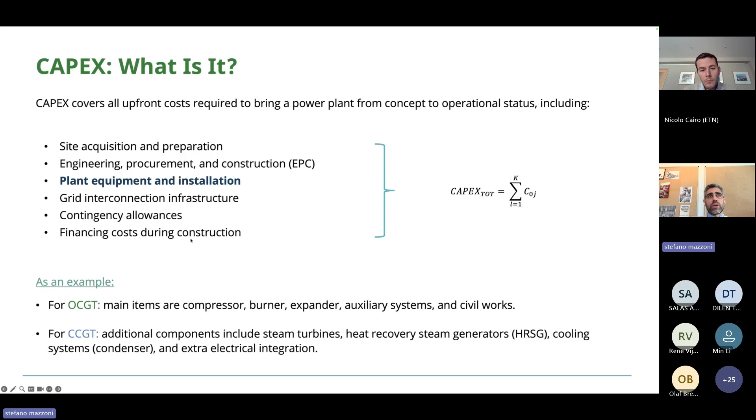So how do we compute this term, the plant equipment? Basically you need to enter the details of the power plant, understanding which are the main components that constitute the plant, and identify which ones actually compute the cost, because usually you have what's called balance of plant, BOP - a percentage of the investment cost for the plant equipment, small costs such as valves, small piping, sensors that aren't computed directly.

For the main components, such as the gas turbine, the heat recovery steam generator, the steam turbine, the condenser, the filtering, and the pumps, you usually compute the CAPEX for each component. And as mentioned before, for the OCGT, you can also break it down into compressor, burner, and expander and so on. For this approach, let's consider the cost of the technology, a gas turbine.

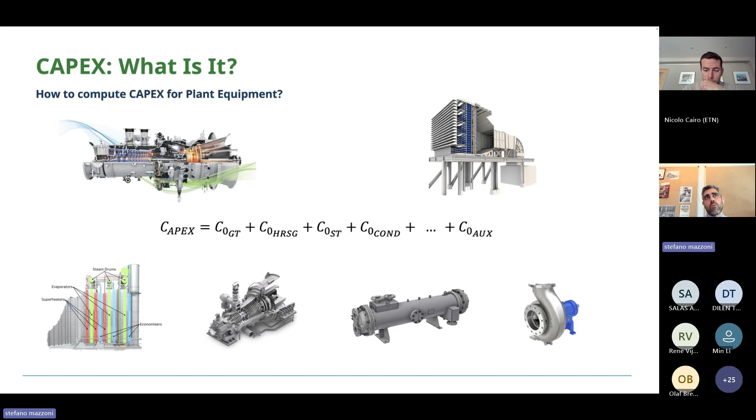The point is that when you ask for a quotation, typically the OEMs are not so open to disclose the prices and cost of each technology. So sometimes if you're rushing and need support with numbers for evaluating project feasibility before the OEM replies to your email asking how much it is and how you can discount it, you can consider using an approach called the factorized method.

This is a modified formulation that we published with some of my researchers in some publications, but the concept is that you have a reference cost related to a reference capacity or reference nominal condition of the system, and you can compute the target cost with respect to a target capacity on power, to the power of n, with n typically ranging between 0.55 and 0.85. Then you can correct it with parameters that account for inflation, currency, location, geolocalization, and some additional regulations.

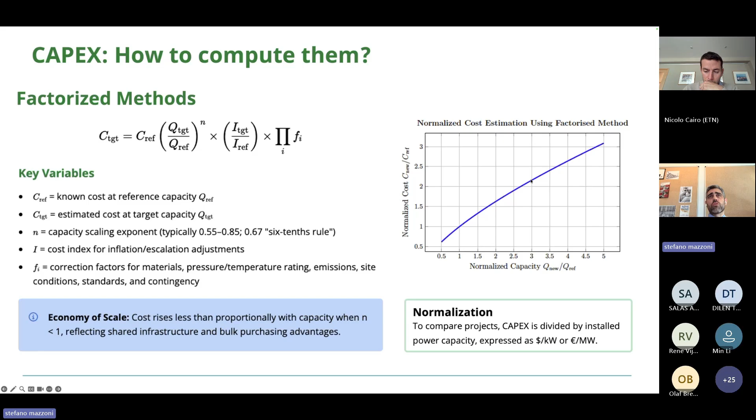And then there is a multiplication of different factors that typically correct it. So if I buy a pump that should be working at ambient condition, or a pump that works in cryogenic or high temperature condition, you use this formula and then multiply by a correcting factor that can be greater or minor than 1. This is a traditional approach that allows a good compromise between accuracy and cost evaluation, giving an identification of the magnitude of the capital cost you want to invest for starting the business. Typically, the shape of the curve is a polynomial expression where you have a nominal or normalized capacity respect to the cost, and after identifying your point, you can correct by the factors.

Here I show how this methodology can be adopted. I went to an IEA report, I think from 2021, which has costs related to CCGT and OCGT power plants in different countries for different capacity. If we want to install a capacity in a region close to one listed here, but I don't have the net capacity perfectly matching this database, let's say we have 450, we will enter the formula with 500 as reference cost, the cost per kilowatt expressed in US dollars per kilowatt electric, at 1,000 for instance, and then we correct with the ratio between 450 over 500, 1,000 divided by the unknown variable, and compute by fixing the index N, which gives the cost of a slightly smaller project.

So if it's 450 instead of 500, if this were linear, we would consider basically a 10% discount, but clearly it's not, because there is a correction that goes with the power of n. So instead of 1,000 becoming 900, it would probably be something around 925, 930.

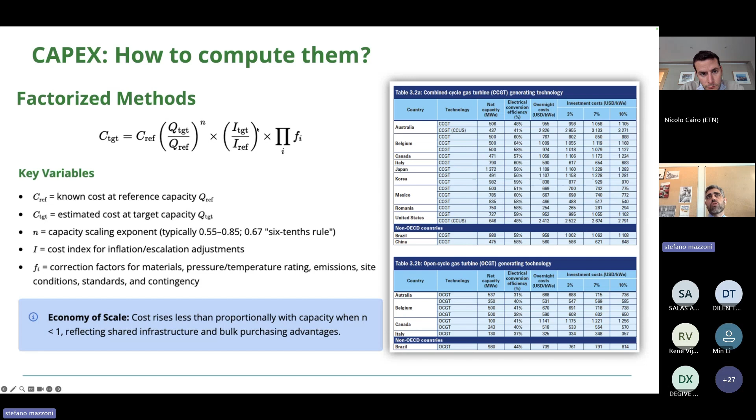This methodology can be easily scaled up to all the components. Here are the terms on the investment cost, as I mentioned, with the index where you have a reference project with a certain inflation rate. If you move the project to another country, you just correct the inflation rate in respect of the other indexes.

Now we go to the second part, which is the most interesting from my perspective, related to the operational cost. In this section we distinguish mainly three voices for the cost: one is the fixed O&M, one is the variable O&M, and then the other one related to fuel cost, and I added also CO2, because in this energy transition we should never forget that in many European countries we have to pay high carbon tax.

So basically, this is something we should consider. When we look at this breakdown of the operating cost, we have some costs that don't vary together with the output of our power plant. So whether I run the plant or not, once it's built and in operation, I need to pay the staff salary, some insurance premiums, the administrative overhead, the maintenance - sorry, there's a typo twice - and this is typically computed as a percentage of the capex. So basically you have all these terms.

The operational cost of the O&M can be calculated as a fixed term of the capex, each voice as a percentage in respect of the capex. By summing them, you can establish what is the fixed O&M.

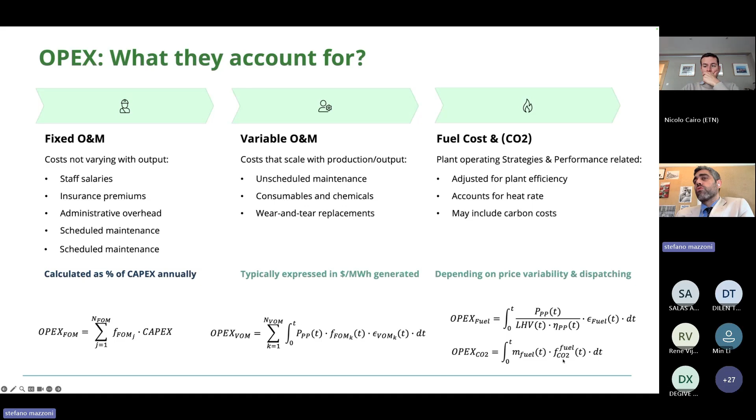Summing up the operating cost structure, you have a fixed part that is CapEx proportional, which you can compute at the beginning of the feasibility study of the plant, and then a part that is time dependent: the variable cost, fuel cost, and operating cost related to carbon tax. That depends on the optimal dispatching strategy, because you can decide how to operate and under which conditions, especially when the plant is integrated in a highly interconnected grid.

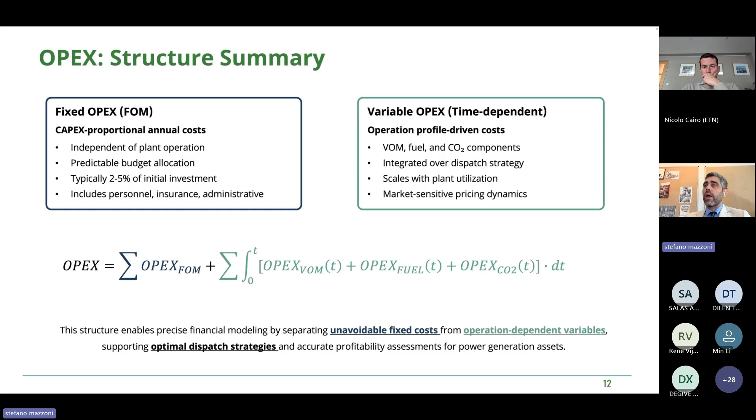Now we move to revenue modeling, and this is something that is probably changing a bit compared to the past, because now we have multiple terms that can compute the revenue. Previously, the only revenue considered was the production of kilowatt hours sold to the national grid, plus some additional services like spinning reserve, and primary and secondary reserve. Now you have multiple services that you can include in the revenue model.

It's something we've already discussed in a previous meeting and continued working on. It's something we should really consider in how we approach managing large CCGT power plants, because the operating hours, and we'll see an example later, the capacity factor affects very much the economic viability of the solution.

When you start to think of different revenue models, you not only increase the profitability of the asset, but you can also consider operating the asset for longer hours over the year. In the revenue model I fix the traditional one, the integral value of electricity generated multiplied by the price you sell it for, plus the sum of many additional terms.

This is a Dirac delta that can be 1 or 0, a binary variable that activates or deactivates the terms. You can consider ancillary services like frequency regulation, operating reserve, voltage support, black start capability, then capacity market, or additional considerations like byproducts to be sold, such as a cogeneration plant selling heat or cold. You can make this formulation as flexible as you like, depending on your boundary conditions.

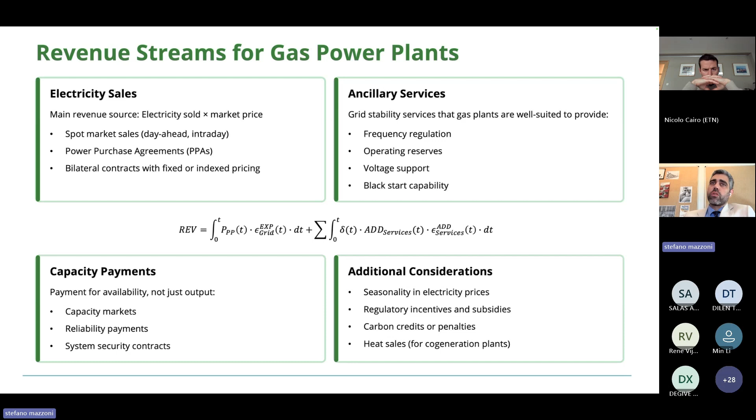Now that we've classified the three terms, CapEx, OpEx, and revenue, we can consider the financial indicators that banks and investors typically look at. There's the return on investment, which measures how efficient the investment is relative to the money invested. The rate of return gives you the percentage you make per year, telling you if it's more convenient to invest in this project or another one.

The payback, which can be discounted or not discounted, represents the break-even point between the investment and the cash flow. Then there are two we'll focus on: the net present value, which computes the value in today's money of your cash flow between year zero and the lifetime of the plant, and the levelized cost of electricity, which tells you the price of electricity required to sell the asset's generation to make the net present value zero at the end of its lifetime.

All these indicators collectively help you become informed decision makers, knowing which numbers to look at to understand whether to go for a project or not. By combining these five, you get a global picture of if and how much an investment is profitable, and you can also decide where the profitability is coming from.

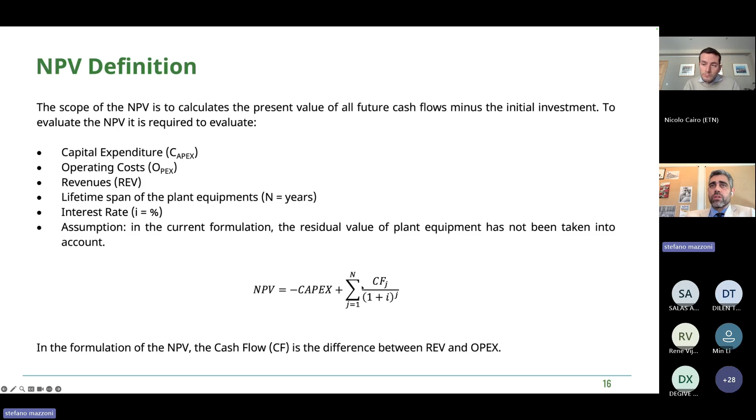From a mathematical perspective, I'll keep it short so we can go to the example. The net present value is defined as the investment cost at year zero, which is negative since it's what you pay at the beginning, plus the sum of the cash flows, where the cash flows are defined as the difference between revenue and OpEx as we defined them in the previous slides, discounted by the factor 1 plus i to the power J, where i is the interest rate and J is the number of years, over the lifetime of the plant.

When we go instead into the levelized cost of electricity definition, this is basically used to evaluate the specific cost that the plant can generate in a certain configuration. For computing it, the main difference is that we don't account the cash flow directly, because the cash flow can be manipulated in the LCOE by this index and put again on the right term.

So in a way, as I mentioned, it's the value that the revenue should have to make the net present value equal to zero. The main difference is that this parameter, in respect to net present value, depends on the electricity production per annum, which is affected by the capacity factor.

So you need to account that a nominal capacity of 300 megawatts running only at 25% of the real hours of the year is less profitable and has a larger LCOE, compared to a power plant that runs at 85% capacity factor.

This is very important to understand if the investment is viable, how much you need to sell the electricity you generate, and to understand if by maybe adding a bit of small capital investment, for example by buying a byproduct that can use more electricity to generate another low-hanging fruit, can help make the LCOE shorter.

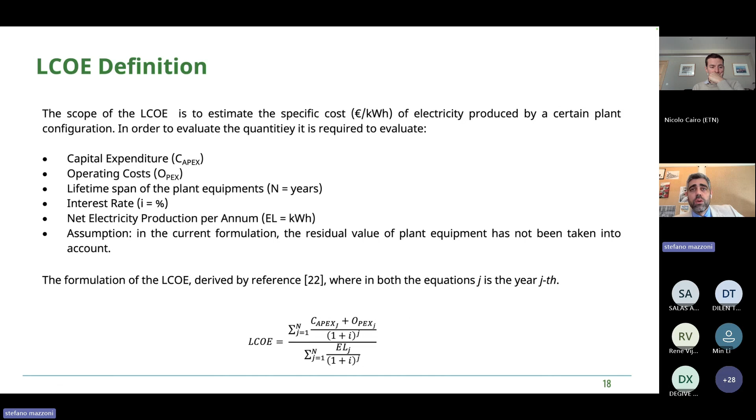Which is the main limitation of the LCOE. The LCOE is very good for assessing the impact that fuel, capacity factor, and discount rates have, because in this formulation, in the OpEx and in the electricity, we have the operating costs related to the fuel also. We define OpEx as a sum of a fixed part plus a variable part plus the fuel. The capacity factor enters into the electricity generated over the year.

But what it doesn't really account for is the profit margin and the return requirements, which are the value of dispatchability, and it's not helping you identify how you can change the financing structure of the project. So it's a very good metric for a first assessment of where you're positioning the technology you want to install, but it becomes a bit limiting when you want to complicate the revenue model, because as discussed before, in the net present value you have revenue as a variable in the expression, while in the LCOE it's not. So with the net present value, you can manipulate the expression a bit by considering multiple services that the power plant can generate, while with LCOE you are a bit limited.

So I don't know if you would like to raise some questions before we pass to the Excel file. Nicolo, you can also help me with that.

I just want to ask, you have used the interest rate in the LCOE calculation. My question is why. Normally people use discount rate instead of interest rate in the LCOE calculation. Could you explain why you use the interest rate instead of the discount rate or the weighted average cost of capital?

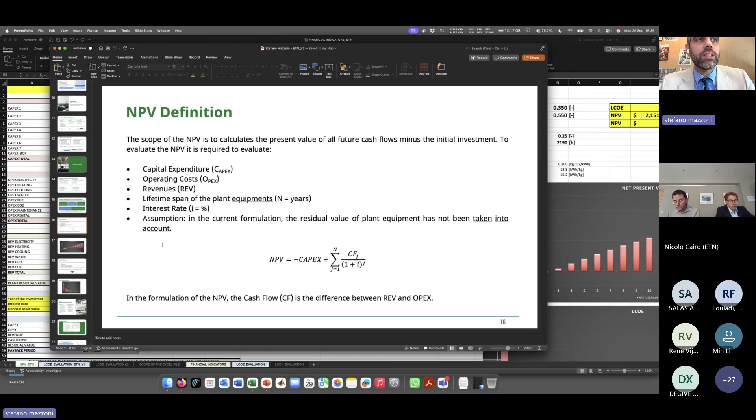So basically, it's a way to account also for the equivalent revenues, because as we mentioned, the LCOE represents the value for which the net present value becomes 0 at the end of the lifetime. And so basically, if we come back to the formulation of the cash flow, it's defined as revenue minus OPEX, and basically means that the revenues, the LCOE in this case, are already discounted by the term sum for J1 to end, 1 plus i to the power of J.

Yeah, thank you, but I would like to mean, what is its physical meaning that you correct the energy by the interest rate, because they are not in the same term. Energy in megawatt hour or something like that, but interest rate is something financial.

Yes, okay, let's try again, I'll try to express myself differently. So this is a mathematical manipulation of the formula, and this is how it's written in almost all the references in the world. This doesn't mean that you are discounting the electricity. This part of the terms, if you bring on the left side of the equation, is sum J1 to n of basically a discount factor that corrects the LCOE. So if you have this equation on the left term that goes up on the right term later, you have CAPEX, OPEX minus revenue divided by the electricity.

Yeah, I got it, yeah, great, thank you very much. So this sum here is just to compute the overall electric work that the plant generates. And then the sum of it is just to discount this one that is an economic parameter. But usually you represent the LCOE like euro or US dollar per megawatt hour, and this is the typical formulation that you can adopt to compute it in a uniform manner, following the standards set by IEA, McKinsey, the World Bank. Yeah, great, thank you very much. Pleasure.

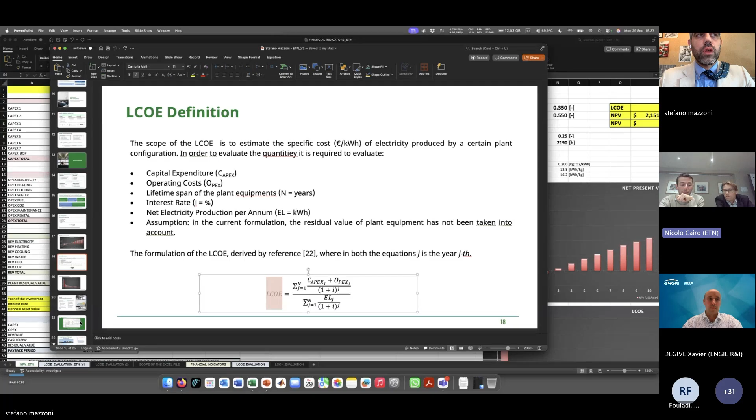I will just show you the concept behind it. We don't need to run many analyses. So I have split it up exactly how we built up the presentation, so we have a section. Can you see the Excel? Is it too small? Can you see it?

We can see it. So basically there is a section with capital investment in which I make an example with this open cycle OCGT. There are all the other equipment you can plug in, plug out. And then there is a balance of plant that is set as a percentage of the capital cost.

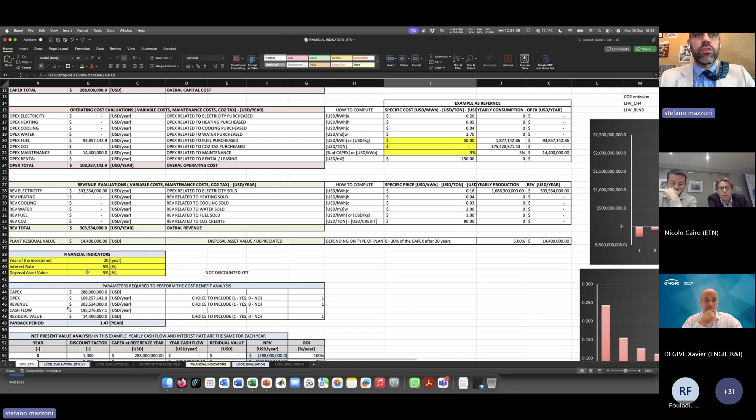Then you have the operating cost evaluation. In this case, later we'll drive you through, there is fuel, CO2, and maintenance. And then you have the revenue model. And then you have the financial indicators, so the number of years, the interest rate, and if there is a disposal asset value, so the residual value. The Excel file calculates for you the net present value, and on the other page, linked to this one, the LCOE.

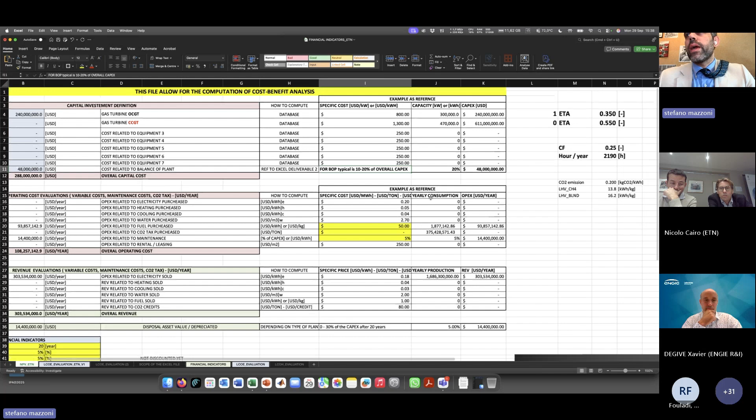So basically, I just created here a mask in which you can change the efficiency of the CCGT. You need to consider that one thing typically not disclosed clearly in the reports you find in the literature is that even if you install a gas turbine with a nominal efficiency of 38-40%, the value of the efficiency you need to include here is the yearly average value, because you're running a lumped performance analysis based on yearly operation. So even if we have 300 megawatts with a nominal efficiency of 41, I don't believe we can consider more than 35 as a yearly average efficiency. So this is the yearly average efficiency.

I consider $800 per kilowatt installed capacity machinery at 300 megawatts, so we range up to 240 million investment. I consider a typical 20% cost for the balance of plant. So we have our total capex.

Then we go to the yearly consumption. So basically, I took into consideration the power output generated. I computed the power output by the capacity factor divided by the low heating value and multiplied by the cost of the fuel, so I can compute the OPEX related to the fuel.

I have computed how many carbon emissions our plant produces. Here you can set which is the carbon tax. I don't know, we can put $25 per ton. So you have almost 10 million in CO2 carbon tax per year.

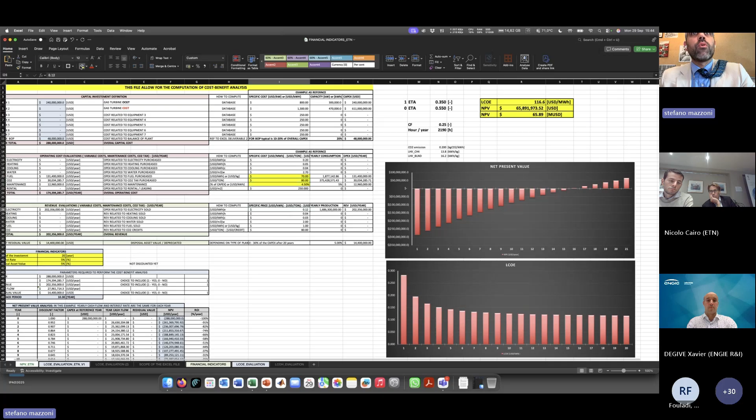So you understand that if you want to come back on the investment in year 8, you cannot sell anymore at 12, but you need maybe to sell, we increase at 20%, probably around 14 or 15, to come back to the same ratio. So with these metrics, you can understand which is your policy of selling and purchasing assets to generate the revenue you would like to have for respecting the KPI from the financial perspective.

So this is something that is a very complicated matter because it's something you need to do before starting the design of the power plant, because you need to start to consider what's happening. And we still haven't varied...

I come back to the previous value of the Excel file, which is the impact of the capacity factor. This is one of the main problems that now OCGT and CCGT has, that they don't run so many hours in a year. So the profitability comes at year 6 with a 25%. Imagine you can start to provide a scenario in which you run for 65%, you come back on the investment at year 3. And for doing so, you need always to assess what is the best configuration and so on.

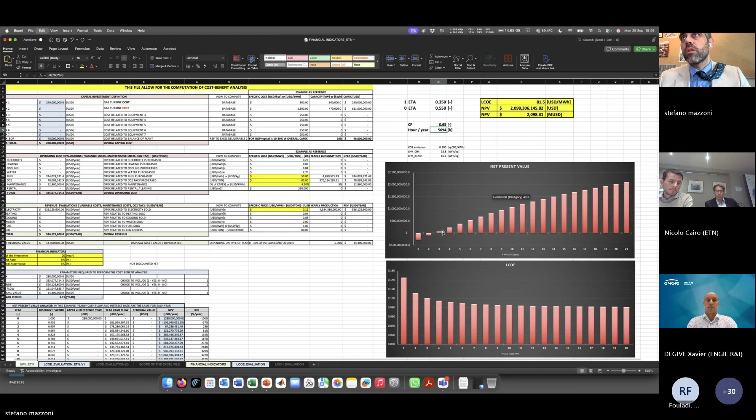So I go back to the presentation for the concluding slides. This Excel file has been adapted to this presentation, but it's what we have been really doing in Southeast Asia for a real project in which a large customer with high intensive consumption for green electrons requirements asked us to carry out a preliminary design of a 200 megawatt, 100% fed by green ammonia CCGT power plant.

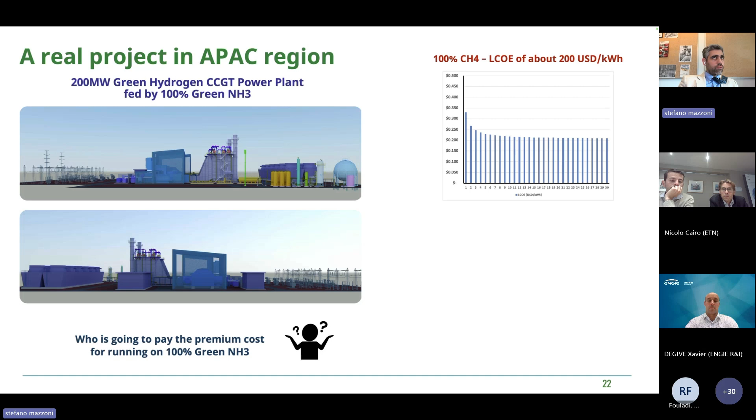And we ran all the analysis, we computed everything on a baseline that was running on methane. This was the year 2022 when I did this job in Southeast Asia, and after COVID the prices were a bit higher, so the LCOE was coming at about $200 per kilowatt hour. And then we provided the preliminary design of all the infrastructure, so the connection to the ship, the cracking process, the compressor for the hydrogen, all the value chain from the ship to the combustion chamber of the gas turbine, and the cost of the electricity generated would have been ranging from $200 to $900 per kilowatt hour.

And we could have performed this analysis only by accounting the LCOE, because at the moment there was no alternative than using the LCOE for accounting for what the profitability of the plant could have been, because there were no other byproducts to sell. That's why, as I mentioned before, despite the limitation, LCOE is a very powerful metric, because with simple assumptions it already starts to drive you to the understanding of which is the price that the customer should pay for allowing you to come back on the investment.

And the only question that I can leave you with on this slide is, and it's the same question I made to my client - for NDA I cannot disclose with you - was: who's going to pay the premium cost of running in green ammonia with respect to CH4? And my client replied to me, 'I don't give a shit,' sorry for the bad word, it's really what they replied to me. The customer is going to pay the premium.

So this is coming back to our beginning slide on the revenue. If the revenue model allows this cost, we don't really care much about LCOE, because the revenue cost will make the system profitable anyway.

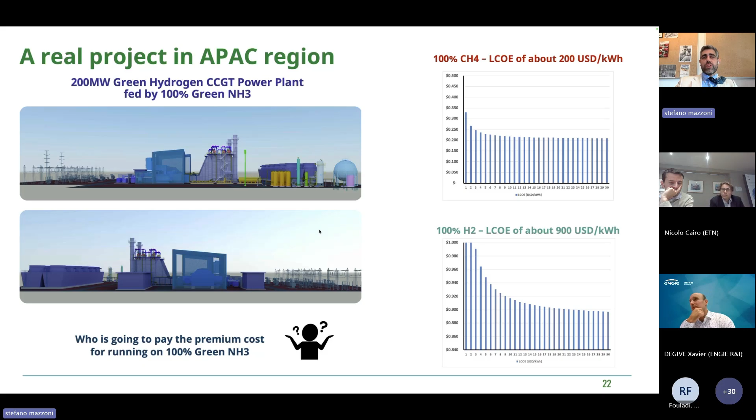So for concluding, when we go for a full techno-environmental economical assessment, we need to consider mainly 3 parameters. One is the location, because every location has a different specific cost for each term - so labor cost, material, the contingency, the currency.

Then there is a part related to how easy it is to connect our plant to the grid. So do we need to build the infrastructure? We don't need to build? Is the infrastructure ready to provide additional services like contingency, voltage regulation, primary control, secondary control? This is another aspect to take into account.

And then there is the part of the soft cost that is related to how I engage with stakeholders, which is the percentage that will lend me the money, which is the cost of the land - basically all the side parts related to the power plant installation. And this regional factor has a real impact on the economics of the power plant.

So to conclude, the main steps I would suggest following when you want a decision-making aware process for deciding whether to go on with the technology: first, select which technologies you are benchmarking and running the LCOE for. Understand which fuel you're going to use in compliance with regulation, and what the procurement strategy should be. Understand which stakeholders you would like to engage to maximize profitability and reduce risk and exposure. Understand if the plant can also be optimally operated to supply different byproducts, not only electricity.

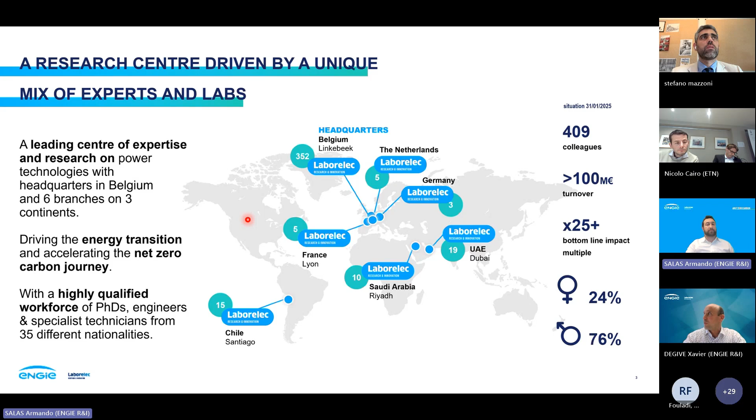So today we are going to guide you through two topics. No need to re-explain what CapEx and OpEx are, because Stefano gave a very good definition of all that. But we've opted to split this presentation between CapEx and OpEx and how we can act on them to optimize plant economics. Of course, the 30-40 minutes we have ahead are not enough to be exhaustive, so we've decided to focus on a number of aspects that are generally the low-hanging fruit, where it's possible to optimize cost on a rather short time basis. I'll leave the floor to my colleague Armando, one of our senior mechanical experts, who will guide you through the CapEx section, and then I'll take over for the OpEx part. Thank you, Xavier. So let's get started.

First point we will speak related to CapEx would be maintenance interval extension, and in brackets we mention gas turbines. Not to forget that it's mainly meant for gas turbines, that's why I put it here. So mainly on gas turbines, the CapEx and the expenditures you will have on spare parts is something you know from the beginning, from the moment you buy your assets. So all the schedule is more or less clear, and we are focusing this product on gas turbines.

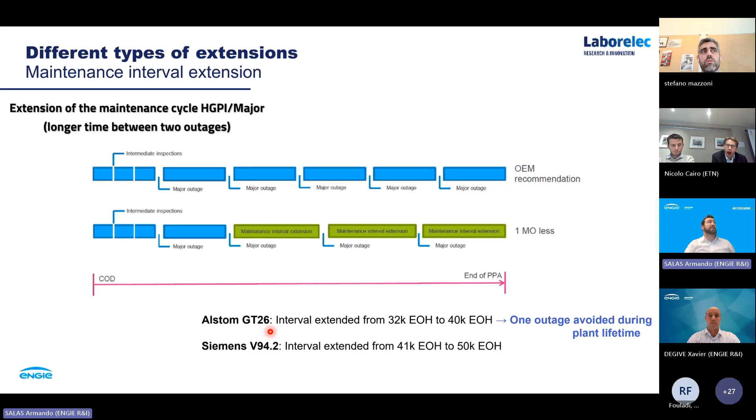And then another way we can do some extensions. That's another flexible option you can have for your maintenance schedule.

Also the reconditioning cycle of parts can be deferred. We have realized that for some components, after they finish their first cycle of operation, there is still remaining life on them. Normally the OEM recommendation would be to go for reconditioning, but we have realized that the condition is still okay. So with minor activities like visual inspections and NDT to discard some damages or risk, we can actually have the parts running for one additional cycle without doing the reconditioning.

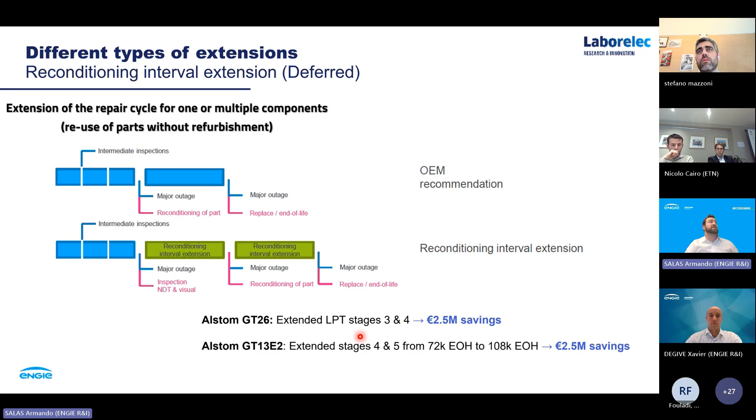At the end, all of these activities can help to have some more savings in maintenance costs. So just to mention some examples: for the low pressure turbines, stages 3 and 4, we have been able to skip the reconditioning, and that simple activity can have savings of up to 2.5 million. Again, this is direct savings on the maintenance cost.

Another example, just to show you the things that are possible. For major components, which maintenance cycle is not as rigid, or not like the hot gas path that needs to be replaced every small interval, even on bigger components, lifetime extension is possible. For instance, on rotors or also on compressor sections, life can be extended with the proper assessment, knowing the risk, and seeing how to mitigate them.

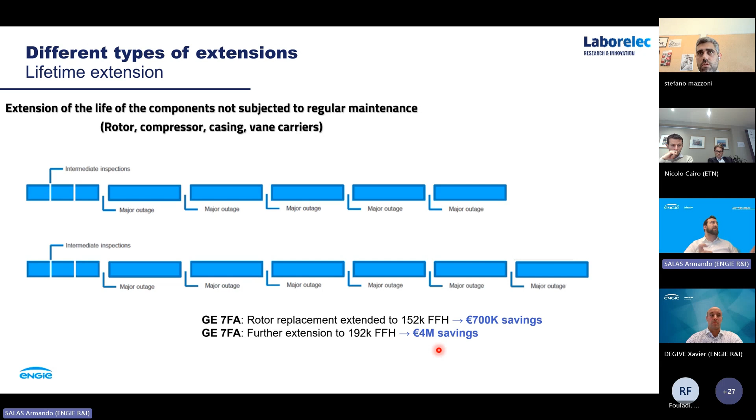Just to give you a few examples: on a GE7FA, the rotor is supposed to retire or be destacked after 144,000 operating hours. But we have realized that this can be extended, for instance to 152,000 - that's one example we have done - and the savings can be up to 700,000 euros. But then another assessment realized that we can go even further, and the numbers start to be bigger and bigger. So these are three things that, in very general words, show how to do extensions.

I don't think we have too much time to explain how we do it, but I will show you an example so you can easily know what we are talking about.

Here we got the request from a client to do the extension on a 7FA GE rotor. Initial life is 144,000 fired hours, and the client wanted to reach 178,000. The reasons, I don't remember in this case, but normally you have the possibility to align the gas turbine outage with the steam turbine or the boiler, or to have several majors at the same time. So some efficiency is won there, and that was the request of the client.

First step for us is to see whether this is feasible. Here is when we come out with a risk matrix, with a set of risks that need to be studied and mitigated. Finally, we have our maintenance interval extension program, which is a set of activities that will help us understand whether those risks we are afraid of, the things we understood that may happen, are happening, or what is the status. So for instance, here, some visual inspections and a set of NDT were done on this rotor to mitigate identified risks.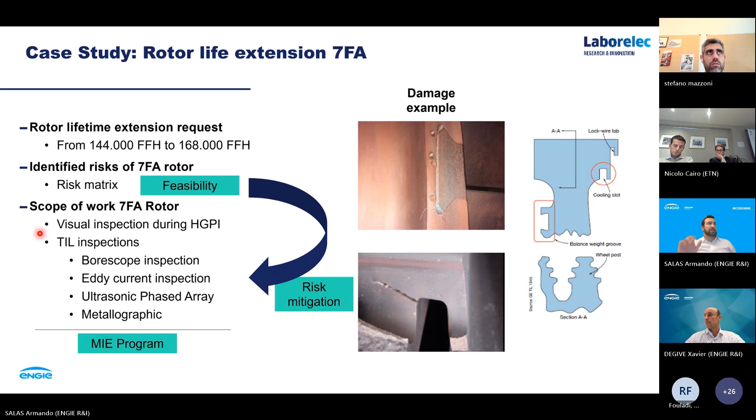To show you a bit how the process was: as I mentioned before, visual inspection identified a set of things. We look into the rotor to see how the condition was. NDT was also recommended in some sections that, from experience on the TILs or user conferences, we know are actually those that may fail. So on those points, we did NDT just to see what the condition was.

At the end, we are discarding any damage or risk to see whether it is feasible to go for an extension. We have strong lab capabilities, so we can also destructively test parts with a referential amount of hours just to know what is the expected condition of the material, of the microstructure, at that stage of life. Then we can get a reference to compare to see what we may expect on the life of the component we are assessing.

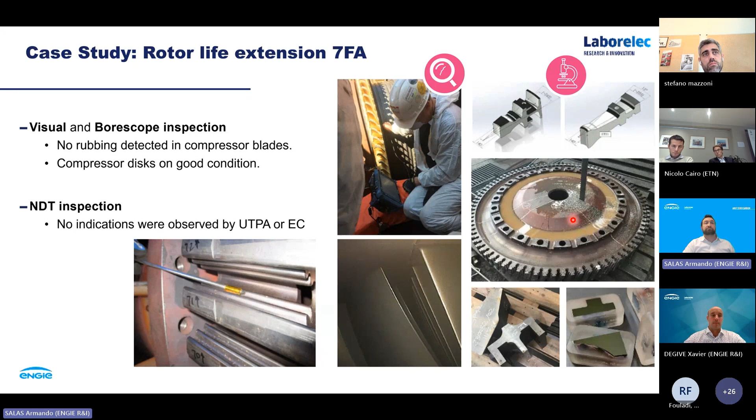I will summarize this case right away. At the end, after our visual inspection, the result is okay, no findings. The mechanical testing considered that the material was still in good condition. We checked for creep on the microstructure, and it was still comparable to new material.

So at the end, the picture we see here is a rotor that ran for 152,000 hours - still 8,000 hours more than the original life. Our conclusion is that the condition of the material is still comparable to a new one. This is just to show you one case that we succeeded to do. Our conclusions are based on the condition of the material and the findings, and also modeling that we are not mentioning here, which shows the life of this rotor can even go further. But in this case, at the end, the client, for many other reasons, decided to stay there.

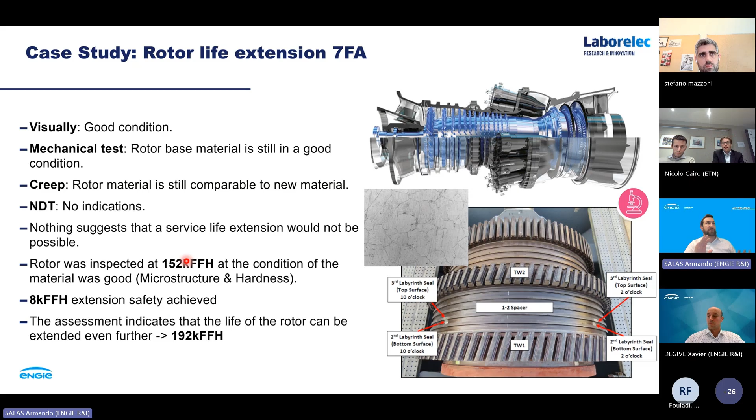So what can we take away to close the discussion on maintenance interval extension? We can defer capital expenses. This methodology, which we didn't have time to fully explain, can help you reduce costs and get flexibility, keeping your unit operating during periods of high revenue. You take a good opportunity and defer your outage when you better need it.

It's important to mention that risks are there because we're extending beyond what the OEM said. But with the proper methodology, proper inspection, proper experience, and at the end a proper assessment of the whole condition and history, we can actually take care of those risks, which is very important. It's not just extending for whatever reason. So the risks are there, but they need to be taken care of.

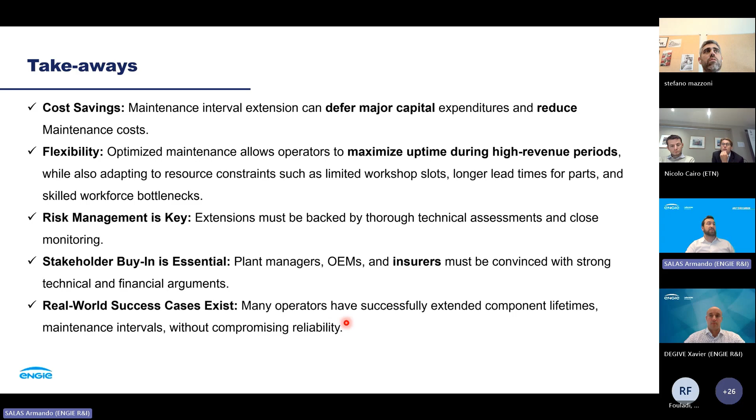It's very important to keep the stakeholders well informed. One we highlight are the insurers, who people may think will not like maintenance interval extension, but actually we've had good experiences. When we show that the procedure is safe and secure, and that we are taking care of it, it works well. We have real world cases working on several units, several technologies, and different components. So it is possible, and that can really help reduce costs.

Maintenance interval extension is very strong when we have units operating on base load. Now we'll jump a bit to cycling, because it changes the rules of the game. The evolution of failure mechanisms is not the same when you have base load versus cycling. That's something that needs to be accounted for, studied and assessed to really see whether your extension is feasible or not.

So I'm saying it brings some other challenges. I'm not saying it's not possible for a cycling unit. We have done extensions on units which are actually on daily cycling, so it's possible.

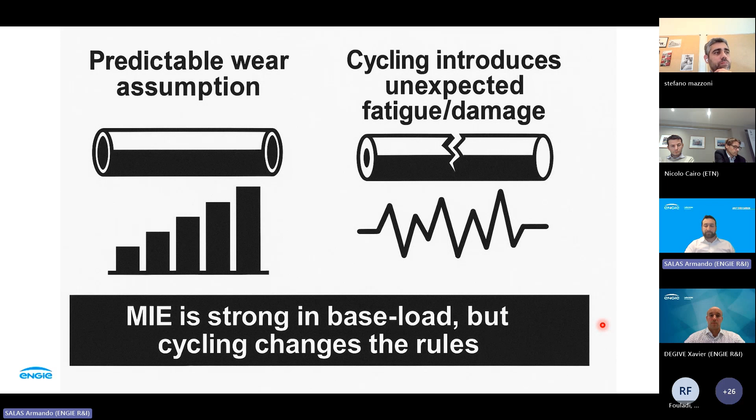I still have a few minutes before I give the word to Xavier, so I'll quickly speak about cycling, just to bring it to the table, because there are costs that we do not see. When we change the operational profile of the units, the failure mechanisms and the things we were experiencing are not going to be the same.

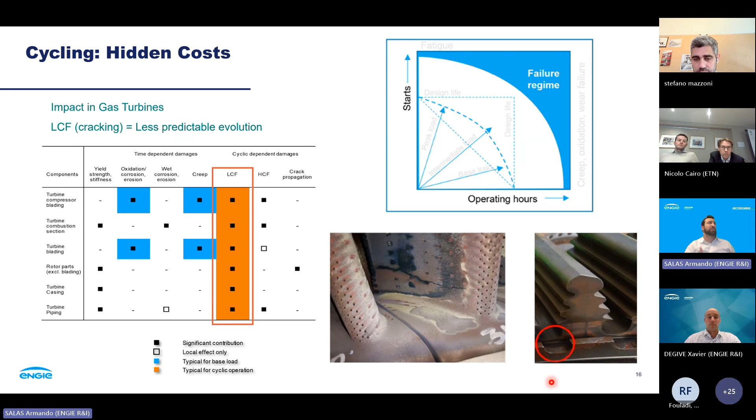The things that were making your unit fail before are not the same as when the unit is cycling. So there is a new trend here, which is low cycle fatigue, and it's going to be really accelerated and present when you have your units cycling. On the picture we see a gas turbine, and cracking is the way low cycle fatigue shows itself. We can see it on the hot parts, but also on different components of the rotor, and the OEMs are now understanding this and following it to really know what the impact is.

A few more words on boilers. It's quite similar, but there are other things that come into the discussion, like corrosion and thermal shock. Again, low cycle fatigue will show itself as cracking on many hot and thick components. That can bring additional costs for maintenance and repair, as well as unavailability and loss of reliability on the units.

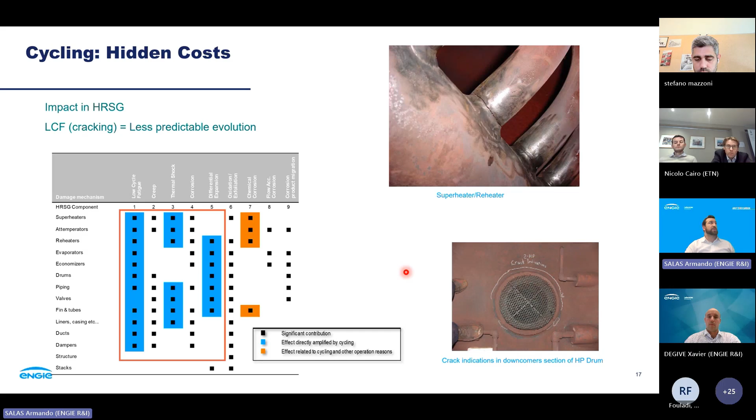So just to finish, I'll go to the steam turbine. Just one example of what can happen with cycling, because we consider the impact of this failure to be really expensive. One of the things we've observed are cracks on the rotor, especially at the steam admission, though it can change from design to design. That is one of the failures that ends up being really expensive.

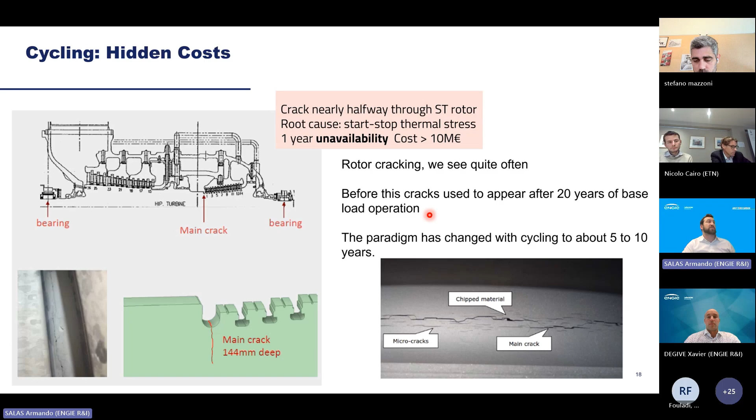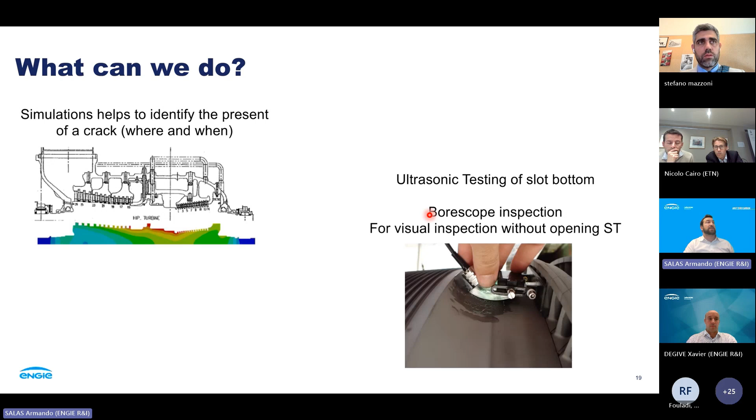There's a huge impact from cold starts on the life of the rotor, so that's something that needs to be looked at, because the way you operate your machine will have different impact on the costing. So just to close my section, what can we do? Modeling can help you identify when your unit can fail and where. Some other activities like NDT can be done in order to mitigate risk. So with this, I give the word to Xavier.

Well, thank you, Armando. So basically, next to the capex, where there's obviously plenty of opportunities to improve the economics, the OPEX is also one of the topics to focus on for the profitability of the plant. Typically one of the most underrated sources of loss of economical performance of plants simply resides in the proper selection of the gas turbine air filters. These are, in comparison with all the other investments you need to do when you build and operate a plant, one of the least expensive capex investments you need to do on a recurrent basis, but it has a huge impact on operation.

The wrong filter can lead to a fast degradation of the performance of your gas turbine, which is represented on the left graph, where you see that over just a couple of months, you are losing up to 15 megawatts, which is huge in terms of loss of revenues. And this is translated also into the technical world - it's not only about losing revenues, but also increased cost, because if you need to achieve, in some instances, the same power output, you have to burn more gas.

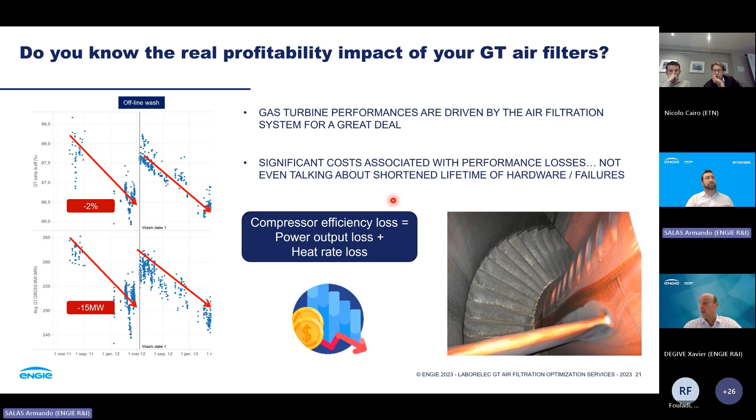So it further degrades your economical performance. And I'm not even speaking here about the downsides of having bad filters, which basically results in a lot of dirt, contaminant, even corrosive contaminant entering into your machine, which ultimately degrades it faster than expected and can even cause some dramatic failure, with extended long time for repair, shutdown, plus cost for procurement of new parts. So it's really something to look at in more detail.

So in order to tackle this issue, we have developed a tool which aims at optimizing the selection of the filter for the environment, specific to the site, and which is based on the total cost of ownership approach. The idea is to translate into money all the technical and commercial parameters of the plant to figure out whether it's relevant or not to change the current filtration system in place at the plant.

So by combining the information and data on the technology you operate at the site, plus what has already been installed in terms of filter - basically how your plant is behaving with that system - plus clubbing it with a forecast of operation, because we know what happened in the past, but we also have to see how it's going to change in the future. And as probably many of you know, the electrical scene is far from being stable, so you have to take some scenarios and make forecasts to see how profitability and cost will change. All that needs to be integrated into the model to come up with the total cost of ownership of your current filtration system and the plant itself.

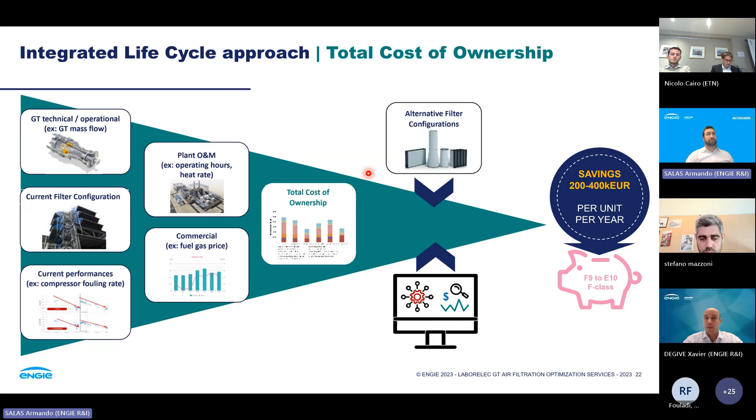Just a remark at this stage: it's not because you say, okay, I will go from F9 right now and move to E10 filtration class, that I'm going to make savings. You have to compare, because on the market you can find filters labeled E10 performance, E10 filtration class, but that are basically not behaving as good as the alternatives. So you really have to compare each and every solution available on the market to choose the right one, which is adequate for your environment and your forecast of operation. So with the filter, that was all what I wanted to explain right now, because for the sake of time, we have to move on a bit.

Another aspect I'd like to bring some awareness on is startups. Plants nowadays have to operate in a more challenging environment. While in the past they'd just start once a week or once a month, nowadays certain plants need to start and stop like twice a day, making the startup a key factor to capture the opportunities on the market. To be profitable and capture those islands of high profitability, you need your plant to be able to start in a reliable and efficient way, which means you need to understand your startup costs.

A startup average cost is ranging between 5,000 and 15,000 euros per start, generally mostly associated with degradation of your capex, which Armando has just explained.

But in order to really improve the startups, if the performance is not optimal, you need to dig into the control logic which drives how the startup is done. This will enable you to look into this logic in order to translate the different startup strategy you'd like to take, or how you manage how fast the start is done, and what's the impact, for instance, on the steam turbine.

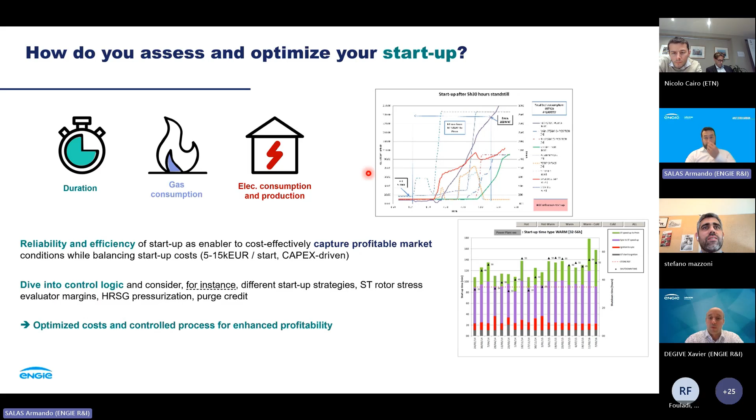So I will now conclude this webinar after having reviewed the macroeconomics, the capex, opex, and how to optimize them. I would say the word would be: dare to be opportunistic. If you want to really reach a highly profitable plant, you need to understand those macroeconomics and also how you can leverage at best all the usual conservative rules embedded in your plant at the design stage. This can be achieved through looking in detail at your capex and opex, but it has to be done in a way that does not introduce an exaggerated new risk level, because otherwise it can even degrade your economical and financial performance in case something goes wrong.

So in a power plant, there are different opportunities which you can leverage. Of course, you are bound by different types of contracts with EPC, with OEM, whoever. So you have to look into your contract where you have some freedom to play, and starting from there, see what actions can improve or extend the lifetime of some gas turbine component, or the rotor of your gas turbine. You can also leverage when the contract expires. If it's just on a time basis, you may want to wait a few years, and then really start at that point in time your program to improve profitability.